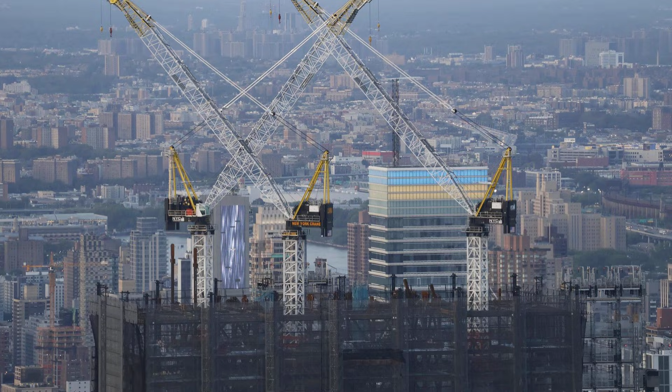July 26th, 2023. Just after sunrise, a 45-story tower crane in Hell's Kitchen lifts 16 tons of concrete as routine as any other morning, until the operator sees smoke rising from the engine deck. Seconds later, flames ignite hydraulic fluid, wire rope heats past critical failure, and a 180-foot boom collapses onto a neighboring building. In a city built on ambition, this is the nightmare no engineer wants to face.

The documentary you're about to watch, Fire at 45 Stories, the 2023 NYC tower crane failure, doesn't just recount a disaster, it reveals the overlooked vulnerabilities inside every urban skyline. What chain of invisible risks led to this near catastrophe? And could it happen again?

Smoke in the cab is never a good sign. Up on the 45th floor, the operator notices it first, thin, sharp, rising from the engine deck. He's mid-lift, 16 tons of concrete hanging from the hook, when the smell of burning oil cuts through the morning air. Seconds later, flames burst out from the compartment, fed by a spray of hydraulic fluid.

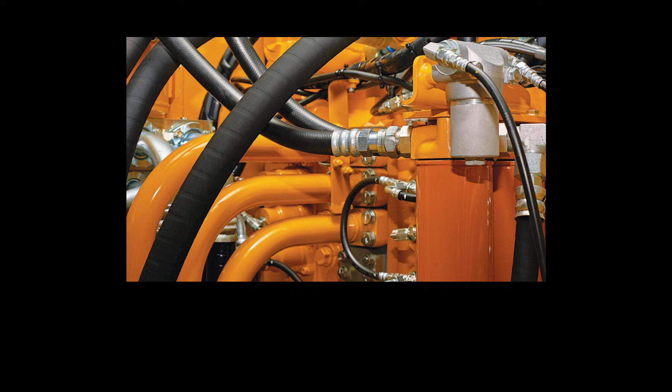In a tower crane like this, the hydraulic oil runs at high pressure through hoses tucked close to the engine and exhaust. The flash point for that fluid is about 200 to 240 degrees Celsius. Diesel exhaust can run hotter than 400. All it takes is one leak, one mist of oil striking a red-hot manifold, and the fire ignites instantly.

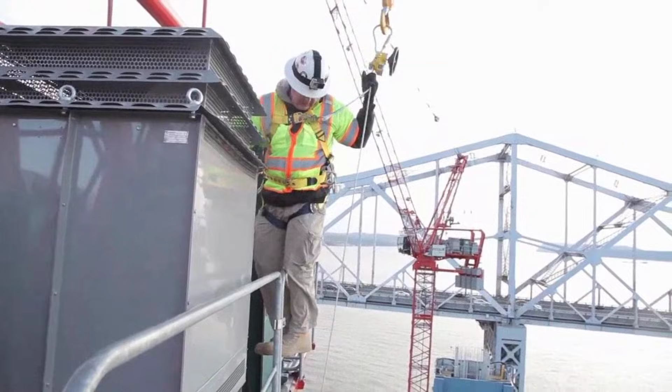The operator doesn't hesitate. He grabs the extinguisher, aims for the base of the flames, just as the manual says. But a pressurized fluid fire is nothing like a trash can blaze. The flames leap back, fueled by atomized oil. With seconds ticking by and the heat building fast, he radios the emergency, then climbs out. Every move matches emergency protocol. No heroics, just evacuation and alert.

In the cramped machinery space, the fire has already begun to eat through cables and hoses. Compartment temperatures spike, creating a furnace around the hoist system. The steel wire rope, now exposed to direct flame, faces temperatures that can erase half its strength in minutes. The real danger isn't just the fire, it's what happens next as heat races through metal under load.

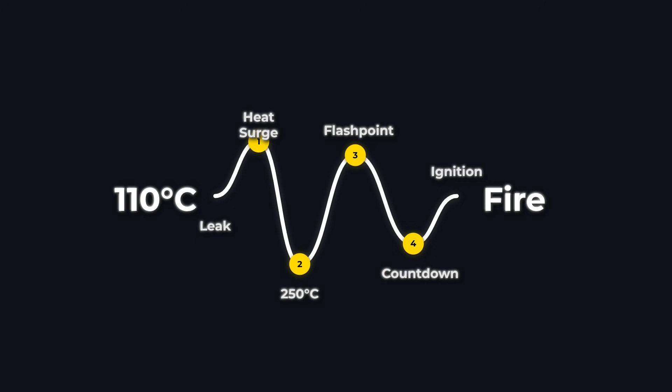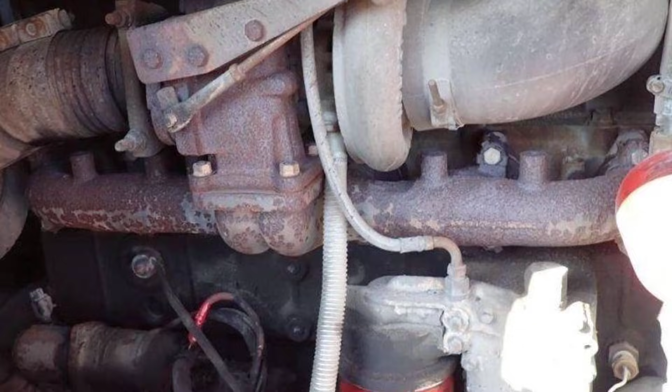45 stories above 10th Avenue, the business end of the crane is packed into a steel-framed box known as the top works. Here, the engine compartment, operator cab, and all lifting machinery are clustered together. A compact, high-pressure ecosystem designed for heavy loads and tight city footprints. The engine deck is the heart of the system. It holds a diesel power pack, hydraulic pumps, and a reservoir that can store over 800 liters of oil.

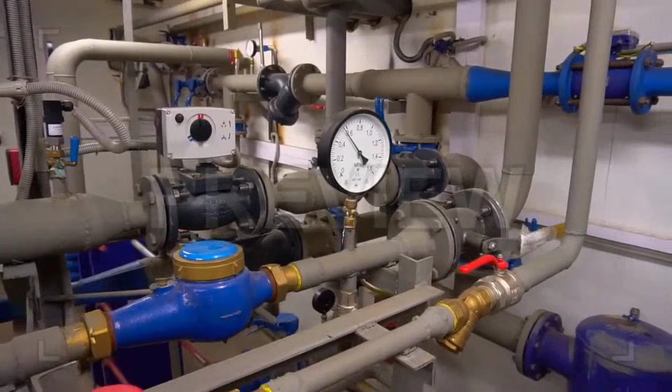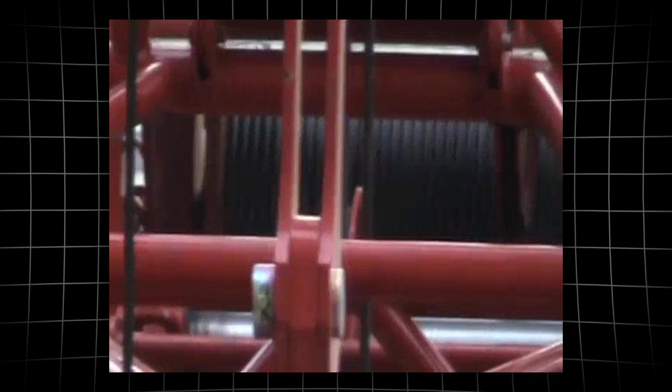Hoses snake from the engine to the winches and slewing motors, carrying fluid under hundreds of bars of pressure. Most of these hoses run close to the engine and exhaust, where surface temperatures can exceed 400 degrees Celsius. The hoist system sits just feet away, built around a drum of high-carbon steel wire rope. Each rope is a bundle of wires, wound in tight strands around a steel core. This cable does the heavy lifting, literally raising and lowering loads up to 16 tons.

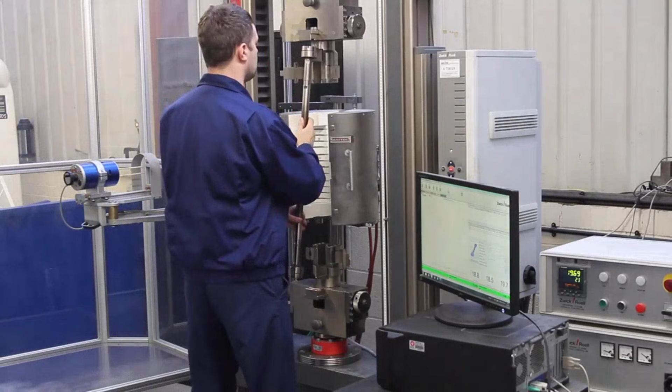Under normal conditions, the wire rope can handle extreme tension, but its one weakness is heat. Once exposed to temperatures above 300 degrees Celsius, the steel begins to lose strength rapidly. At 400 degrees, permanent damage sets in. By 600 degrees, the rope can lose more than half its rated capacity, even if it looks intact from the outside.

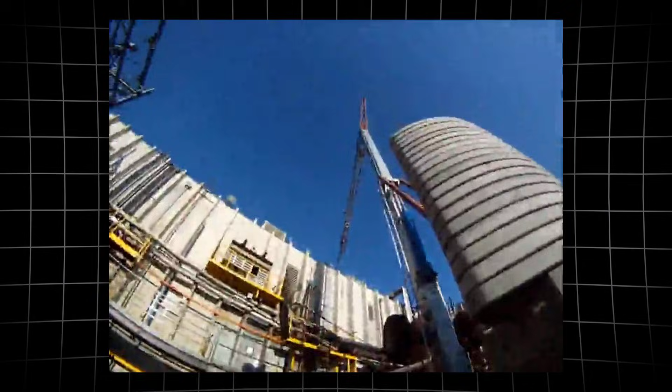Unlike some international models, U.S. cranes rarely come equipped with automatic fire suppression or thermal sensors on the engine deck. Compartment fires can go from spark to full involvement in under 2 minutes, with little to stop heat from reaching the hoist cable. In a crowded topworks, the proximity of hydraulic lines, hot engine parts, and the main lifting rope creates a perfect storm. A single leak or flash fire can compromise the entire system before anyone has time to react.

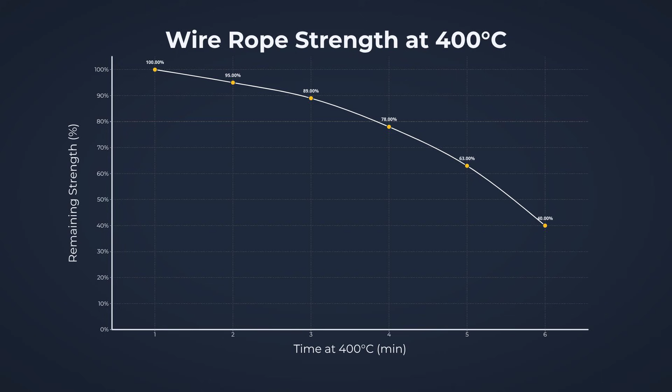Heat climbs fast inside a steel compartment. As the fire rages on the engine deck, temperatures around the hoist drum soar past 400 degrees Celsius. Metallurgical tests show that high-carbon steel wire rope, under these conditions, can lose more than half its strength in just a few minutes. The cable doesn't have to melt to fail, just soften enough for the live load to overwhelm it. Every strand in the rope is now under stress, holding 16 tons of concrete mid-air.

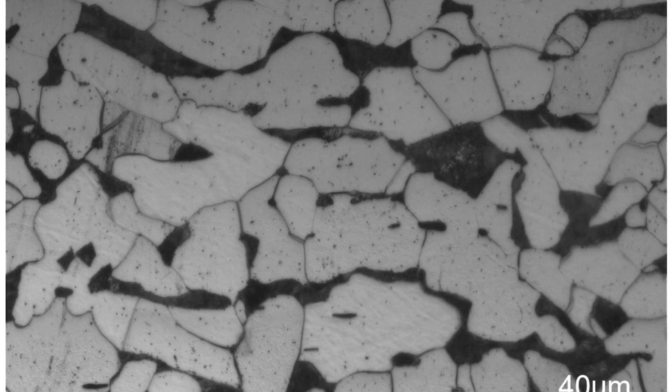According to safety engineers, once the rope's temperature crosses that critical threshold, the structure of the steel begins to change. The cable may look the same, but its ability to hold weight drops off a cliff. In the span of seconds, the hoist rope goes from safe to unpredictable. Under full load, the weakened cable starts to deform.

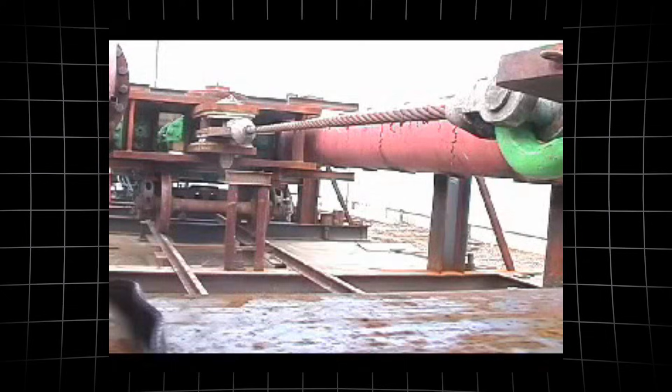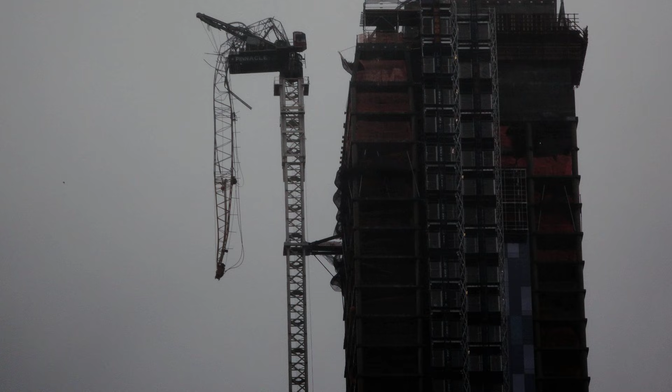Internal wires stretch, then snap. The load shifts. The drum can no longer control the boom's position. The boom swings out, pivoting on the slewing ring. With the rope failing, gravity takes over. The entire top section, nearly 180 feet of steel, arcs downward.

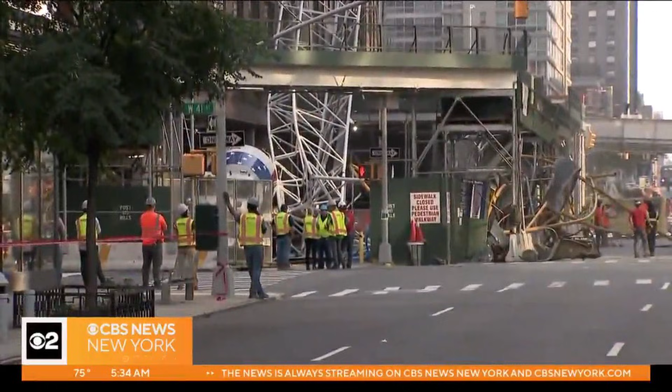It strikes the neighboring building at 555 10th Avenue, then collapses onto the street. Debris rains down, glass shatters, and the force of impact sends a shockwave through the block. For engineers, it's a textbook case of thermal compromise, where a fire turns a precision lifting machine into a falling wreck in less than 5 minutes.

The first thing most people remember is the sound. A deep, concussive boom rolls through Hell's Kitchen, rattling windows for blocks. For residents in 555 10th Avenue, the shock hits twice. First the noise, then the tremor, as the crane's boom slams into the building. Shards of glass explode outward. Thousands of razor-edged fragments rain down onto the street.

Pedestrians sprint for cover, ducking behind cars and scaffolding. One construction worker, just steps away from the impact, describes feeling the ground shift beneath his boots. "It sounded like a bomb went off," he says. "Then it was just glass everywhere."

Inside Covenant House, alarms blare. Staff rush to evacuate over 100 young residents. The air outside is thick with dust and the smell of burning oil. Sirens echo from every direction as fire trucks and ambulances converge on the scene. By the time the streets clear, more than 120 people have been evacuated from neighboring buildings. Apartment dwellers, shelter residents, and a charter school teacher leading her class out through falling debris.

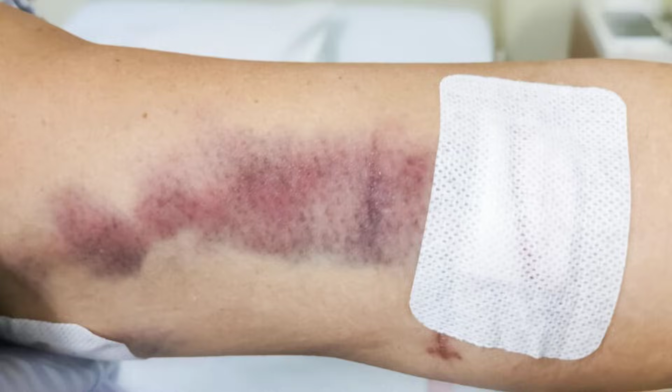In total, 11 people are treated for injuries. Most are minor, cuts, bruises, smoke inhalation, but the sheer scale of near misses is hard to process. On a different day, with heavier foot traffic, the outcome could have been far worse. The chaos on the street gives way to a tense, organized response. Emergency crews set up triage zones and cordon off the block. Even as the fire still burns high above, the priority is clear. Keep people away from the danger zone, account for everyone, and brace for whatever comes next.

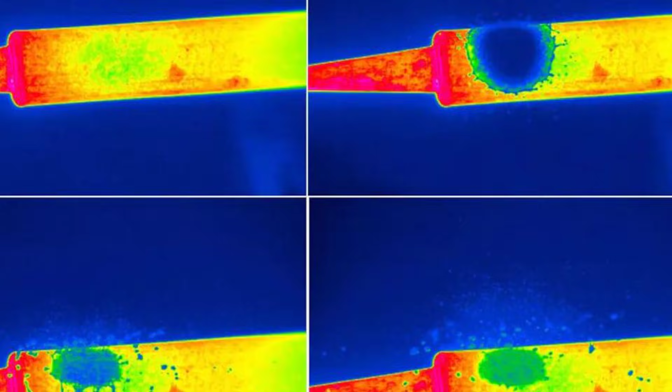More than 200 firefighters and paramedics converge on 10th Avenue, lights flashing, sirens echoing off glass towers. The first priority is clear: contain the fire, keep the public safe, and prevent further collapse. FDNY Command deploys drones above the skyline, streaming live thermal images straight to chiefs on the ground. For the first time at this height in New York, aerial feeds guide hose teams to the engine deck and help spot unstable debris. Inside the command trailer, real-time video shows which sections of the boom are still burning, which facades are at risk, and where it's safe for crews to move in.

On the street, triage zones take shape within minutes. Paramedics tag and treat the injured, 11 in total, including 3 firefighters and several pedestrians. Most walk away with minor cuts or smoke inhalation. No one is trapped. No one is killed. As soon as engineers confirm the towers are stable, teams sweep the area for secondary hazards. The block stays closed, but the worst is over. For officials, the combination of drone intelligence, rapid triage, and strict exclusion zones proves the value of every drill and protocol in the book.

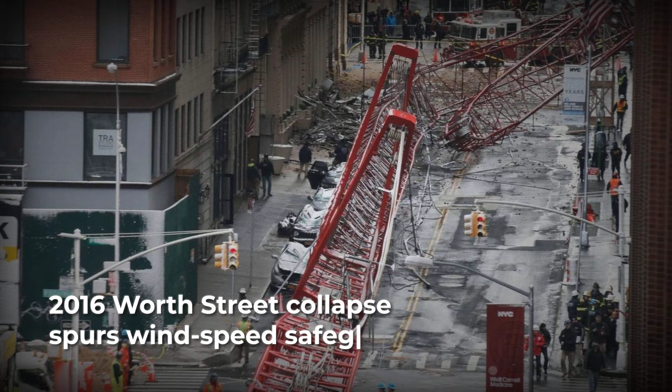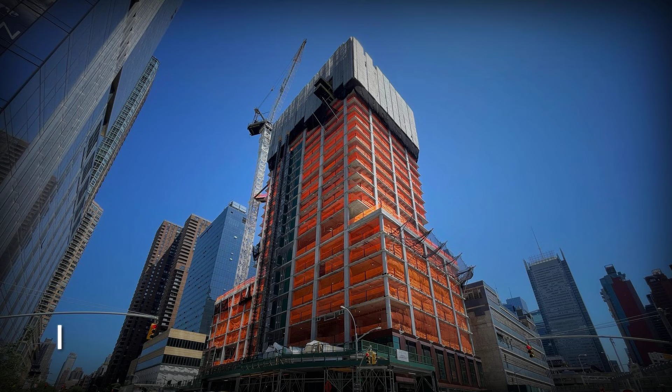After every major crane disaster, the rules change. In 2008, a collapse on East 51st Street killed 7 and forced the city to overhaul inspection and operator training. The 2016 Worth Street accident, blamed on wind, brought new anemometer requirements and stricter limits for crane operation in bad weather. Now, the 2023 fire is pushing the industry toward a new set of safeguards. The Department of Buildings issued a stop work order at 550 10th Avenue, launching a full investigation and calling in outside experts to review the entire crane fleet.

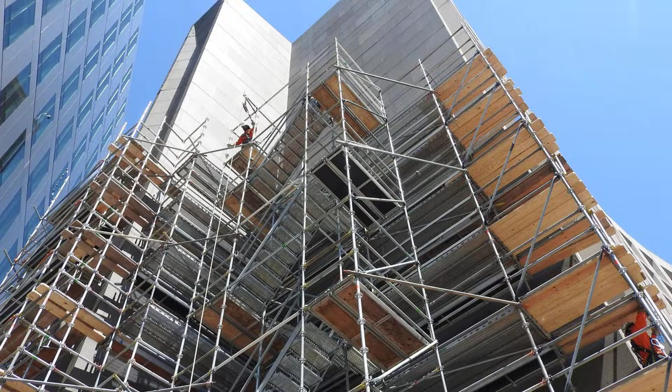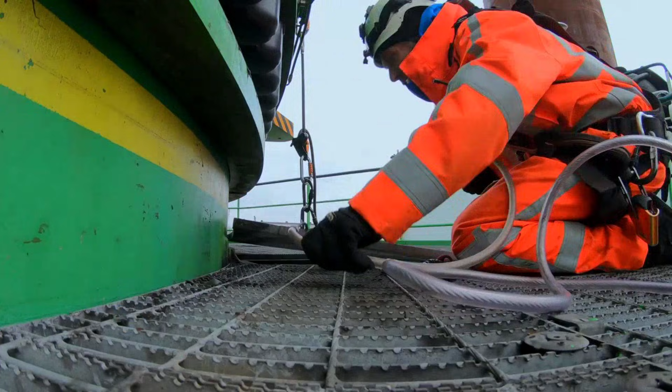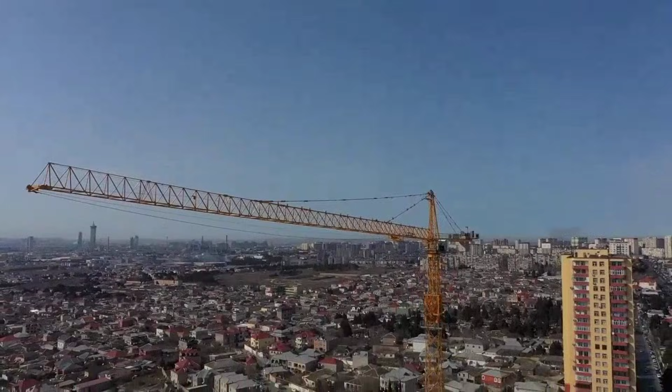Cleanup and facade repairs are expected to cost between $5 and $8 million, one of the most expensive single-site remediation efforts in recent memory. Safety engineers and construction academics are pressing for automatic fire suppression on engine decks, mandatory thermal sensors on hoist ropes, and new criteria for rope replacement after any fire exposure. Drafts for these reforms are circulating, but as of late 2023, no formal code amendments have been released. For now, every crane operator and site manager in New York is watching closely, knowing the next round of rules could change how high-rise construction is done for years to come.

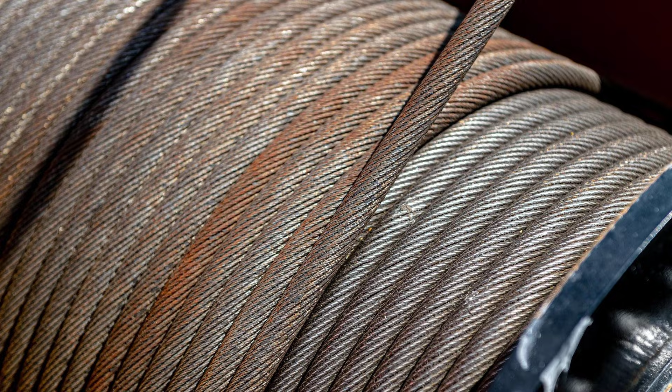At 7:25 a.m. on July 26, 2023, a hydraulic fluid fire erupted atop a 45-story tower crane, leading to a partial collapse that injured at least 11 people and sent debris across 10th Avenue. Investigation confirmed that rapid heat exposure triggered wire rope failure, causing the 180-foot boom to strike a neighboring building. The FDNY's 5-alarm response, including early drone deployment, helped prevent fatalities and limited further damage.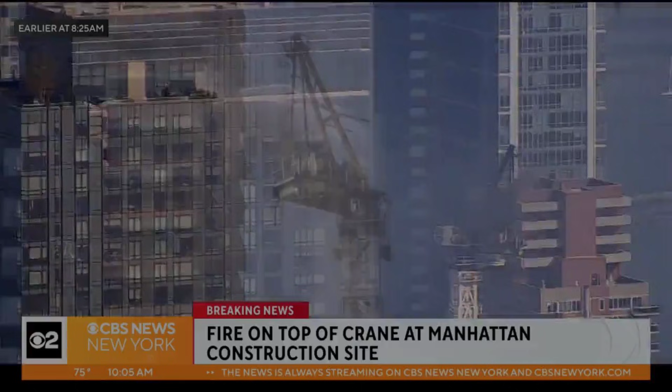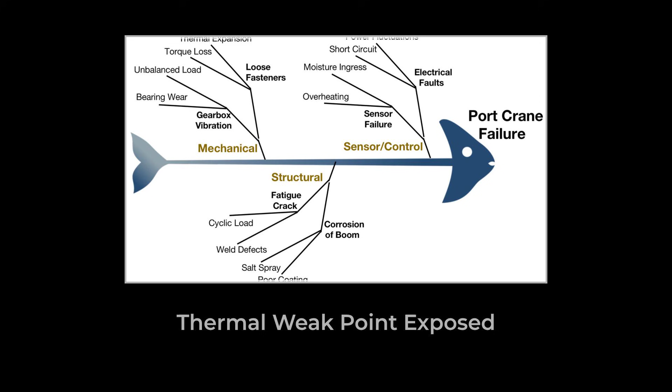While official reports detail the ignition sequence and mechanical breakdown, the precise timeline of the collapse and some forensic data remain classified. No new citywide fire suppression mandates or inspection intervals have been formally enacted since the incident. For engineers and construction leaders, the 2023 crane fire stands as a clear case study in the consequences of overlooked thermal vulnerabilities and the importance of coordinated emergency response. The documented facts point to one lesson: in dense urban construction, rigorous prevention and real-time crisis management remain essential safeguards.